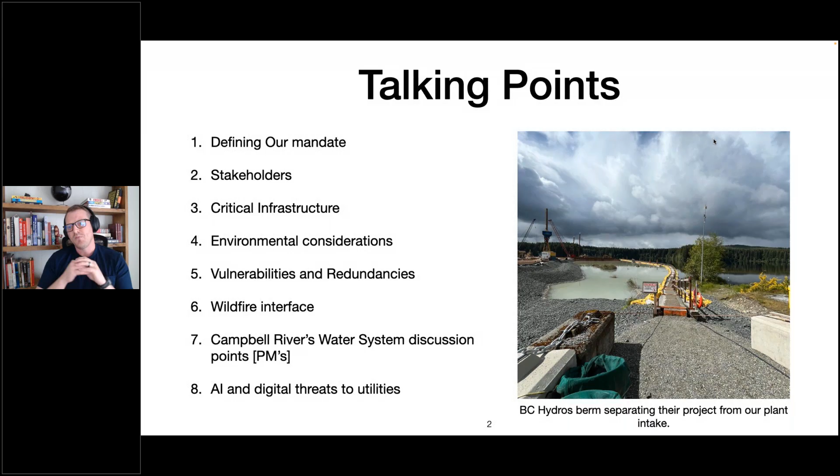So they have a plan in place if there was a breach, and then they would let us know. We would activate our plan, but they're doing a really good job. They're monitoring it constantly, and we haven't had really any issues yet.

Okay, so defining our mission. Of course, we're following the BC Drinking Water Protection Act, and the Drinking Water Protection Regulation is our foundation. And our mission, simply put, is to provide water that is suitable for consumption and for fighting fire. And to achieve this, we have a layered approach. We have operational competence, preventative maintenance, tied in with asset management, and then capital investment and stakeholder relationships.

This picture here is in the downtown core, our lowest zone. What's going on here is we've increased the pressure downtown, and we'll talk about that a little bit more later, but there's a good reason for it. But it's proving out that a lot of the old infrastructure has a lot of weak points in it, and a lot of things were just on the edge, and a few of these things have been pushed over the edge. So a cork popped out of the main here, and there's a big spiral fracture in the cast iron. So we dug it up. It was quite a day, and it was business as usual.

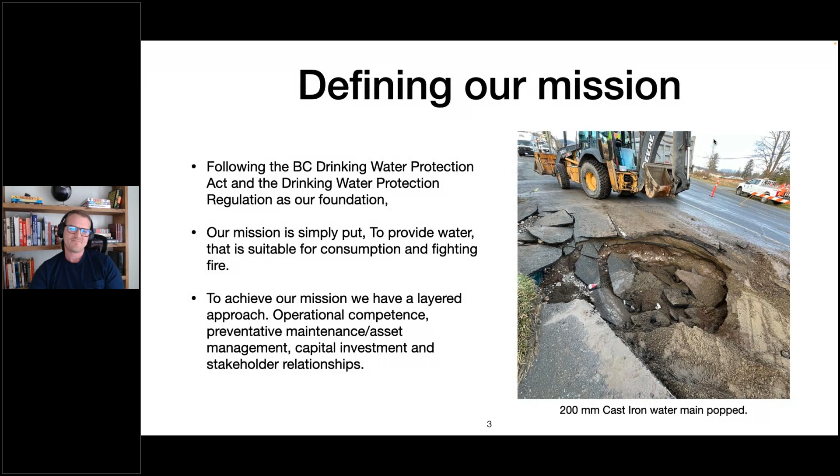Okay, so essential service. Resiliency means to withstand or recover quickly from emergency conditions. That's kind of the theme of today. And essential utilities are expected and counted on to perform their duties under any and all circumstances. So we achieve this by running reliable systems for our customers.

And here's a picture. We're doing a small capital upgrade. We regularly are getting rid of old PRVs, and we're in a chamber here. We had some stubborn bolts that weren't coming off with the socket set, so we decided to cut them off. And I will point out that this operator is wearing a hoodie with strings, which isn't appropriate for running a grinder. It could get caught up, so he shouldn't be wearing that. And on top of that, he should actually be wearing a face mask, or even a full face. We wear that now because you get the particulate protection, but also your face is fully covered and protected.

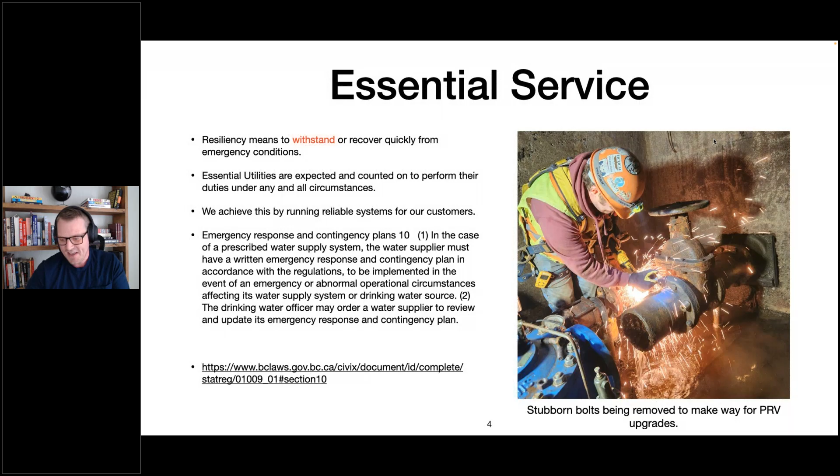And I don't mind saying that because I know that guy. That's me, so I don't mind calling myself out.

Okay, so stakeholders, they're stronger together. The definition is people and entities that affect outcomes related to our mission. As I like to say, friends in high places from different spaces. It's kind of cheesy, but it's true. So I have a bunch listed, and there's even more, but I'll just highlight a couple. Ultimately, the taxpayers are our customers, and we serve them. Like I was saying, they expect that the utilities are going to run and function no matter what. People want to wake up to flushing toilets and water running in all conditions.

Different levels of government. So policymaking and funding power, grants for infrastructure projects. This is at the higher level of management and the echelons of decision making, but it doesn't mean that we can't be in on the conversations when we're in operations or safety meetings. We know the system better than anybody, so we should be bringing forward our concerns and having a lobbyist outlook. We want to make sure that we're befriending the right people and influencing them so we can get positive outcomes for ourselves and our utilities.

In Campbell River, BC Parks has a bunch of trees that are really close to our water supply center. That's our intake building. And they're in the way because we're putting in some new reservoirs. So we want to have a good relationship with them and try and streamline this process as fast as we can, so we can get those trees out of the way.

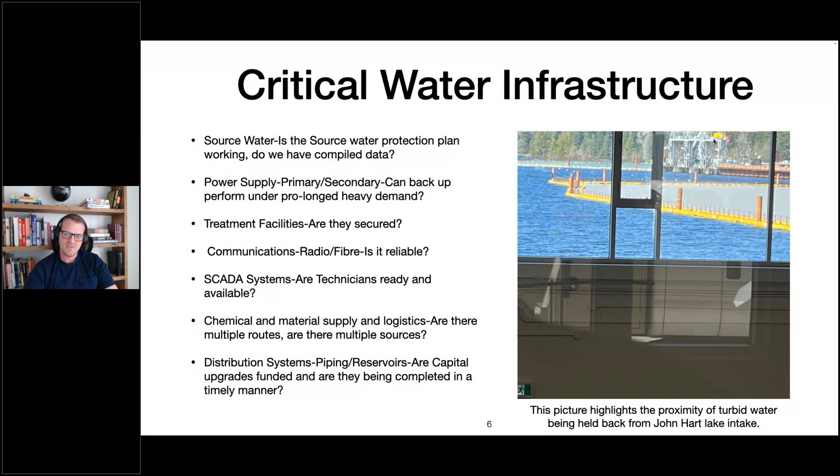Okay, so we'll quickly talk about the threats to water infrastructure. So the obvious one is wildfire interface, landslides and disruption to logistical supply lines, cyber attacks on digital infrastructure, lack of planning, collaboration between stakeholders, inadequate resources, funding and training, lack of control over policy.

What I mean by that is that most utilities belong to a municipality, and we're just a cog in the bigger wheel. We're not necessarily the focus on long-term planning and funding and things like that. So that could be a challenge, right? We want to do a lot of stuff. We want lots of money and we want to do lots of upgrades, but they have to think about some of the other things that they have to look after, some of the other departments.

Single source, single intake. It's kind of a wish list item for me. Some places have it. We don't have it, but I think it's cool that if you had a problem with your intake you could switch to another one.

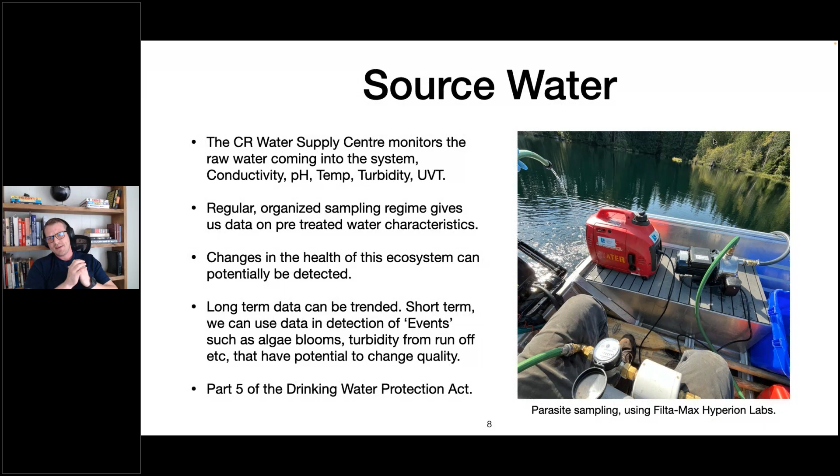Okay, so here's one of the other threats, the logistical vulnerabilities. So everybody probably remembers the atmospheric river back in 2021. Everyone's like, what's an atmospheric river? Wow, it's this heavy rain, and it got this cool name. But the flooding and the washouts damaged more than 20 sites along the Coquihalla Highway, 130 kilometers. And 7 bridges were completely collapsed or heavily damaged.

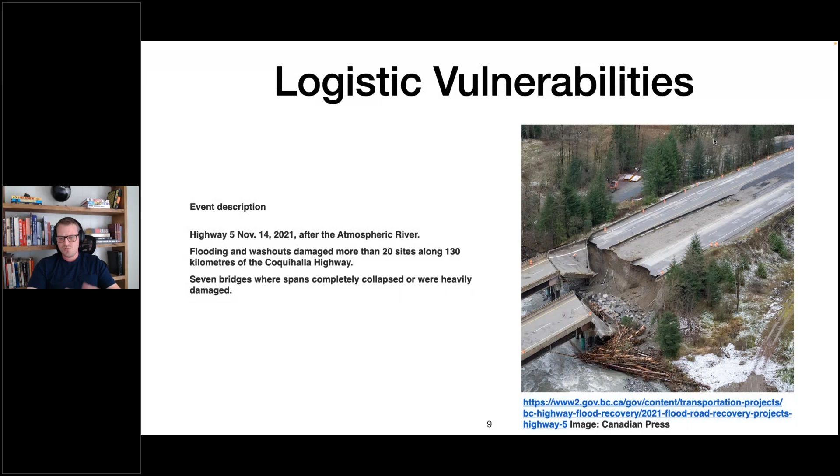So the reason I throw it in there is that I was talking about different routes for our supplies for our plants, and this stuff is not traveling on this highway at this point in time. And luckily we have other highways, but you can just imagine that something this bad happened to this highway, and then maybe just 1 or 2 other events happened at some of the other highways. We have major backlogs. So if you're looking for something material-wise that you need right away for your process, you might not get it. So that's why we want to think about these routes and the availability of products from different suppliers.

And that's why I bring up stockpiles. So like I was saying earlier, we have hypochlorite that we generate on site. And to do that, we use salt. So on the floor there, you can see we have about 14 pallets of salt ready to go. And this time of year, with the heavy flows, we're using about a pallet, almost a day, a week, roughly. So once we get down to maybe 7 pallets, we're going to think about ordering another set and keep that stockpile way up. So bridge or no bridge, we're making bleach. That's the idea.

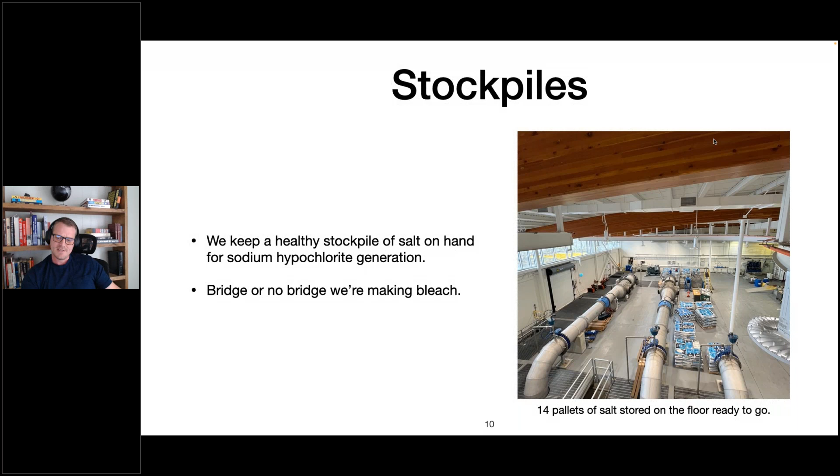So with that, we don't want to be a one-trick pony either. So taking systems offline for maintenance or emergency repair, it's going to happen. So we need to plan for it and expect it. Taking reasonable steps to imagine outcomes as they might unfold in undesirable situations, that's kind of what I'm getting at. And then when you do that, you can let this determine your system's vulnerabilities and your state of readiness. So storage capacity and redundancy are key.

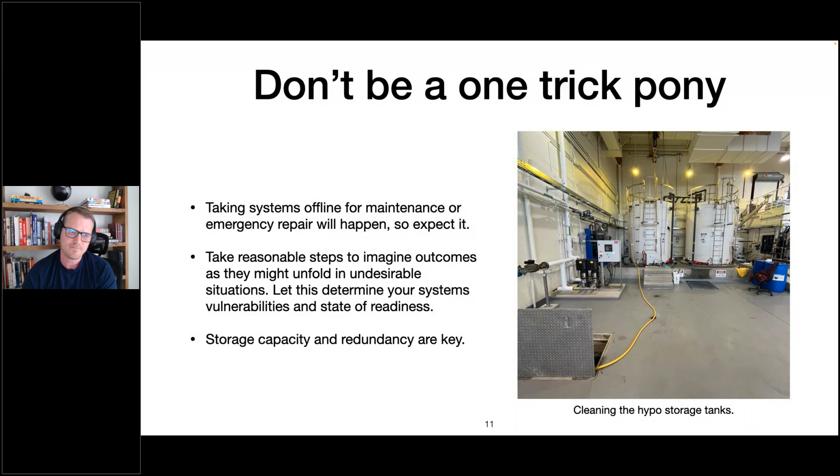So the redundancy piece for dosing for a critical system like this would be having a separate system altogether. So we have 2 barrels of 12% bleach, and we have these Grundfos pumps, and we can switch that system off, isolate it, and we can pump bleach in from this system. And this is our redundancy. So if we need to do emergency repairs over there for whatever reason, we'll switch to this and we'll run this. And it's good to run through it if you do stockpile it and you have it as a backup system. You want to run through it probably every 3 months or so because it starts to degrade and loses its potency. And then the second part to that is you can get your operators to practice switching in between the systems because it's not seamless. And if you've never done it before, it's a little bit nerve-wracking.

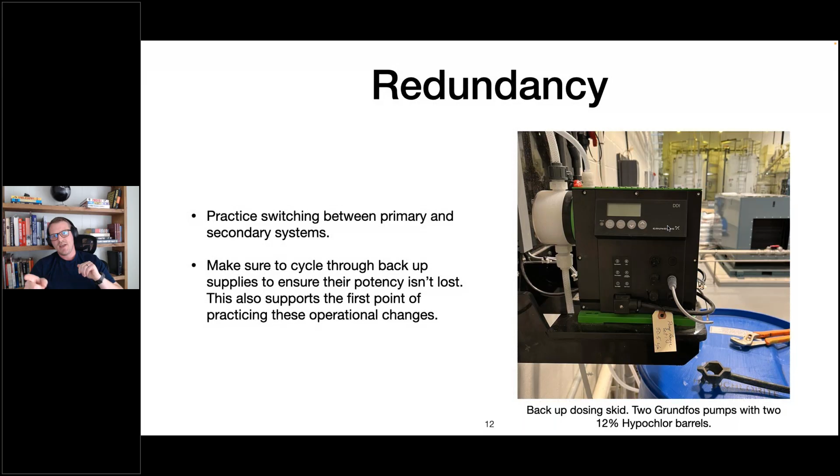So in Campbell River, we have an on-call system where all the operators go on call for a week at a time. And they're distribution operators and they do some of the treatment as well, but they have to look after both when they're on call. So this is a good opportunity to get them up there and practice switching in between systems.

Okay, so this is why. So this is the main dosing skid. And as you can see, we have 2 pumps and only one runs at a time. So there's a bit of a redundancy there, because if one craps out, you can run the other one and then fix the one that crapped out. But the problem is they share a common header on the bottom there, that's drawing off the tanks. So what happened here, these are displacement pumps. That bracket on the bottom left, it wore through the line and created a leak, and it was obviously going to get worse.

So we tackled it by isolating this system completely, isolating the tanks, switching on that emergency backup system, 12%. And at this time of year, with the amount of bleach we had on site, it's about 16 hours of dosing available. So we cut that piece out, and we just glued in a straight piece there, and we used 2 unions, so we didn't have to push apart the brackets and take a bunch of stuff apart. It was just put it in and do it up, and you're good to go.

And off to the races we went. Everything held, and it was good. And we switched it back on.

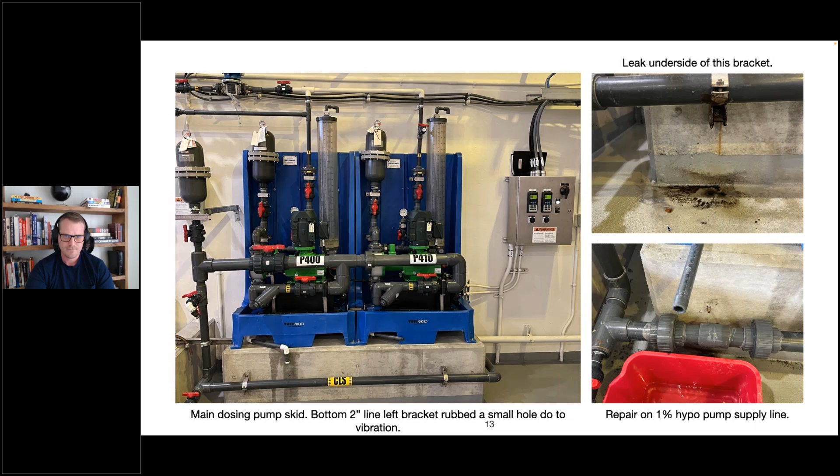So in a similar case, this thing's getting, it's not old, but it's about 8 years old. So we're starting to get some things leaking now. And here's a case where we're able to just isolate the one pump that was leaking and then turn on the other pump, like how it was designed to be. But as you see, it's pretty tight, and there's a bit of orientation involved.

So if you're gonna tackle something like this, or if someone asks you to, after you isolate it, you take it apart. Before you take it apart, you should take some pictures and really study the orientation. As you can see, there's a back pressure valve in the back, where the handle's in the back of this pressure gauge. You have to get that right, obviously, the first time. Otherwise, you're gonna have to cut it apart and redo it.

And the same thing with the unions. Make sure you get your collars in the right place before you glue them, because you'll go to do it and you'll notice your collar's not on, and then you're cutting it all out again. And that's why I said it was a little tight and there's a little more swearing, because these things happen.

So in the bottom right picture, I just wanted to emphasize that if you're going to be doing some gluing on systems that are corrosive, like hypochlorite, make sure you use the right glue. That orange can is specifically for things like hypochlorite. It's listed on the can there.

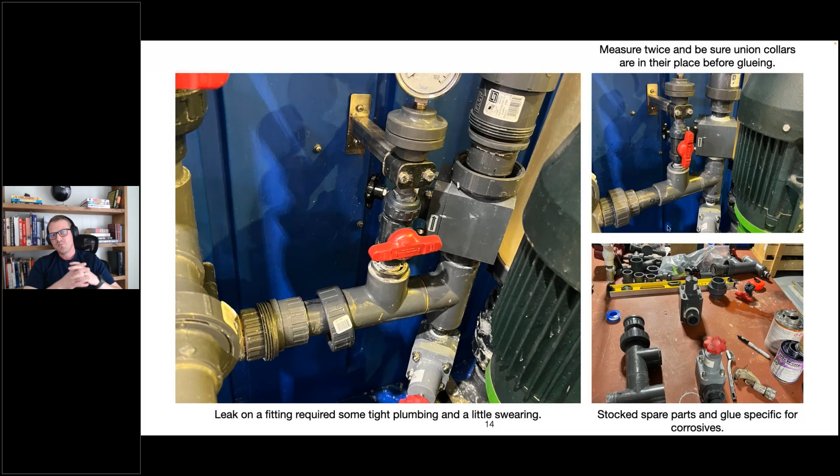And then additionally, you want to make sure that you have spare parts available to you and stocked and cataloged. We don't want to be having these situations come up where we need to make repairs, and then we have to worry about securing supplies. You should have some backup supplies on hand and ready to rock and roll.

Okay, so like I was saying earlier, we have an on-site generator, and it's pretty sweet. It's all I've ever known. Before this, we did have chlorine gas, but when this plant was built, they pitched the gas and they installed this system. And it's pretty slick. The only byproduct that's dangerous is hydrogen gas, which is very explosive.

But there's a bunch of interlocks built into the system, and there's blowers, and they had to be running and ejecting before this thing even starts up. So it's quite safe. We have hydrogen detectors all around and lots of fail safes. So it's a good system.

So here we're doing maintenance on it. This is a scheduled muriatic acid wash, and it takes off all the stuff that gets baked onto the plates inside, and you'll start to notice it kind of running funny, and your testing will be a little bit off. But we kind of go by hours as well. So like every 1,000 hours, we'll start to think about running an acid wash on this thing. And you can use vinegar, but we started using muriatic acid just because it's so much stronger and it does such a better job.

But before you put any acid in there, make sure that you rinse it out at least 3 times. Make sure there's no bleach in there. You don't want to mix bleach and the acid. You can make other gases that are deadly. So you have to be really careful with that.

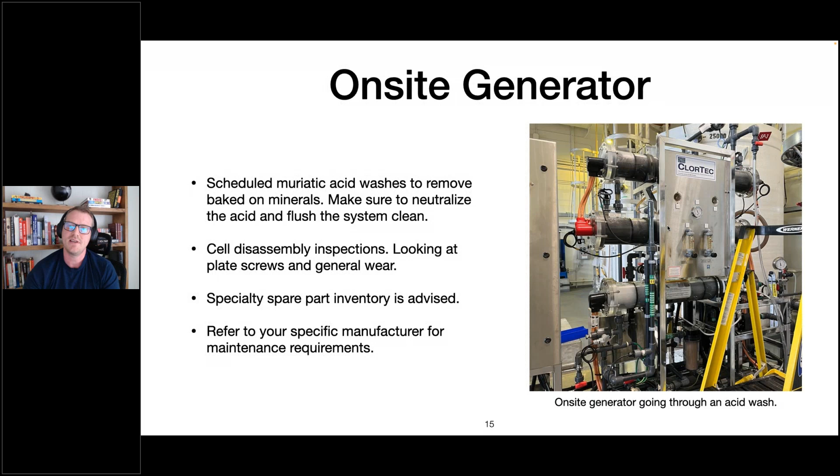Okay, so just make sure you do refer to your specific manufacturer for any maintenance requirements. It's not a one-size-fits-all kind of deal. Okay, and when you're doing this stuff, just remember that slow is fast.

You don't want to rush through this. This is a very expensive system. So take your time and think it through. Make sure that the valves are in the right positions when you go to fire it back up. You don't want to have your discharge valve closed, obviously.

This system has a fail-safe in it. It has a burst disc. So if it does over pressurize, that'll burst and then it'll just run onto the floor. But obviously, you just want to avoid that altogether. And then make sure the people around you are good to go, right?

When you're mixing acid and water or when you're neutralizing it, it's one thing to have your own PPE on, but just make sure that your buddy that's working with you is also ready and talk it through. And then I know it's tempting, I've done it, to rush into these types of jobs if you've done it a bunch of times because it becomes second nature. But it's really good to have the SOP out and just go over it at least once with your partner because you'd be surprised, little steps that you might miss can end up being important ones.

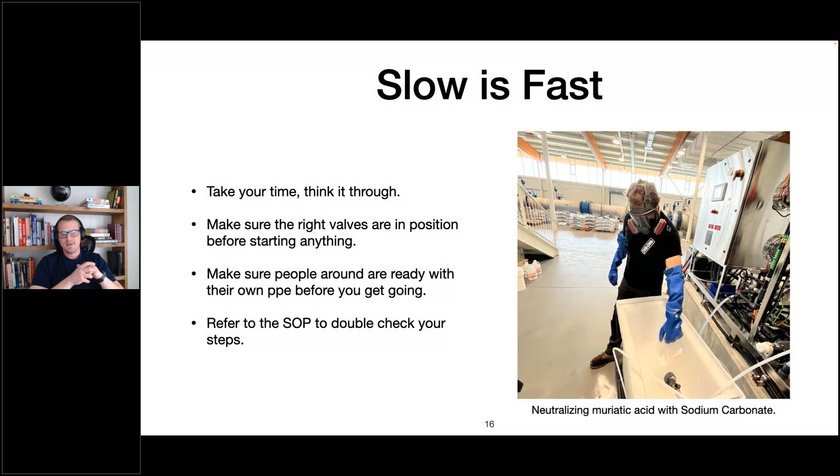They recognized some of the shortcomings of the system, and that was a couple of things. So they had undersized generators that couldn't keep up to the process in high demand, and it ended up being boil water for 17 days for one of the counties. And you're probably thinking that's the least of their worries, and I kind of agree, but it's just the principle of it, of having the right size backup generators to run the process no matter what.

And then they had some troubles with communication and sharing public notifications, and then just extreme water system demand due to fire response and high leakage. So I think it's interesting to always remember that when you have a devastating fire like this, the services are getting burned up too, like the connections, and then they're open, right? And it's a huge parasitic loss on the system.

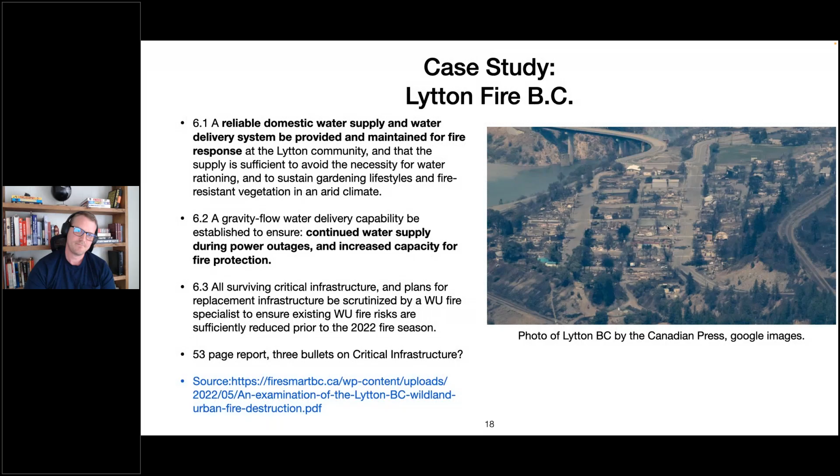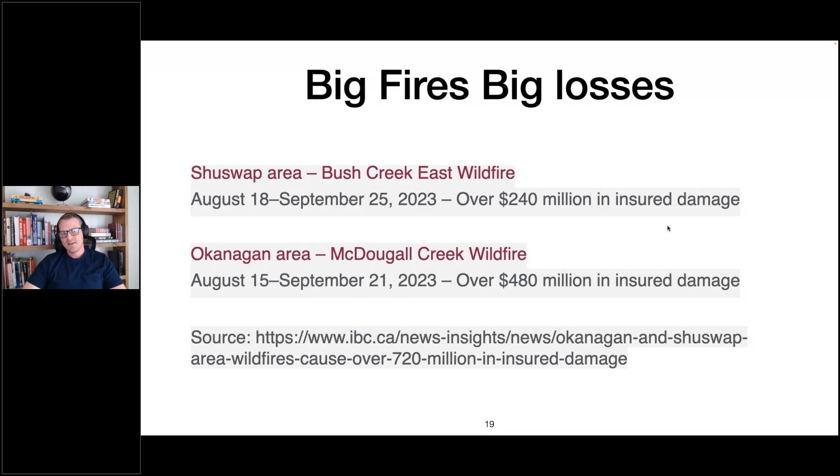So if you wanted to put a dollar amount on these fires, here it is. Big fires, big losses. This was in 2023, Shuswap area, Bush Creek East wildfire, and the Okanagan area, McDougall Creek wildfire. Together, $720 million in insured damages. So that just really emphasizes how big and how damaging these fires really are.

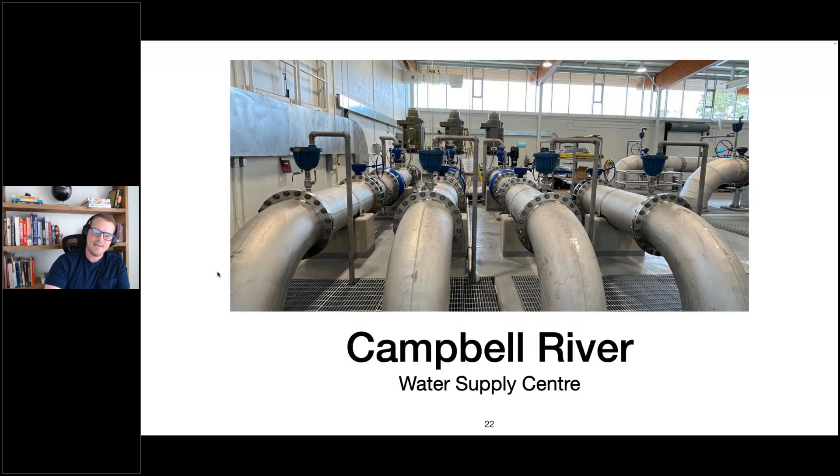Okay, so again, we're switching gears. This is the Campbell River Water Supply. This is the intake section of the building. And I'm going to start talking a little bit about water supply and maintenance and that sort of stuff. So here's a background on the system. So Campbell River Water System, the system capacity through that plant is 1,050 liters a second max. After that, the velocities become too high against the lamps in the quartz, and that's from the manufacturer.

So we set aside 220 liters a second for fire protection. That's reserved, and that's in accordance with the fire underwriters' requirements. And more would be needed, obviously, in major events like that wildfire or any wildland interface or a major catastrophic event. So Campbell River has limited storage capacity. We only have 2 reservoirs in the main distribution zones, and then we have an additional one in the north system. That supply center supplies water to both systems, but the north system just has a lower service level. It's just for our industrial zone and one street, basically.

So without residential water meters in the city, we must rely closely on monitored flow data to enact water stage restrictions promptly when summer flows get to an average of 700 liters a second. So as soon as it gets to 700 liters a second on average, we enact stage 2 water restrictions, and it's actually very effective. We go down to 1 day of watering a week, and we see a significant improvement. So water metering and system storage are 2 serious considerations for future improvements for this system. And we are breaking ground in the near future, and we're putting 10 megs of storage up at that plant. So it's going to be a huge improvement for us.

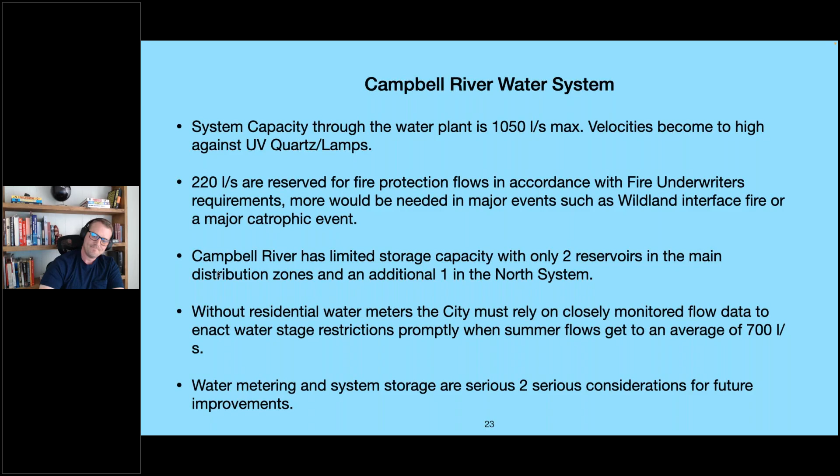Okay, so let's talk about water supply. It's key to understand where your water is going. This aids us in understanding complex shutdowns, rerouting of water in emergency situations, and just the overall balancing of your PRVs and your reservoir discharges, because they're feeding into the same zones. So we want to be able to balance them and control when the reservoirs are unloading and loading. So maintaining the PRVs and the reservoirs is critical to the reliable movement of water throughout the system.

Here's one of our chambers, and we just finished installing 2 new PRVs. These are Cla-Val valves, and we replumbed them and we got them online, and they're working really well for us.

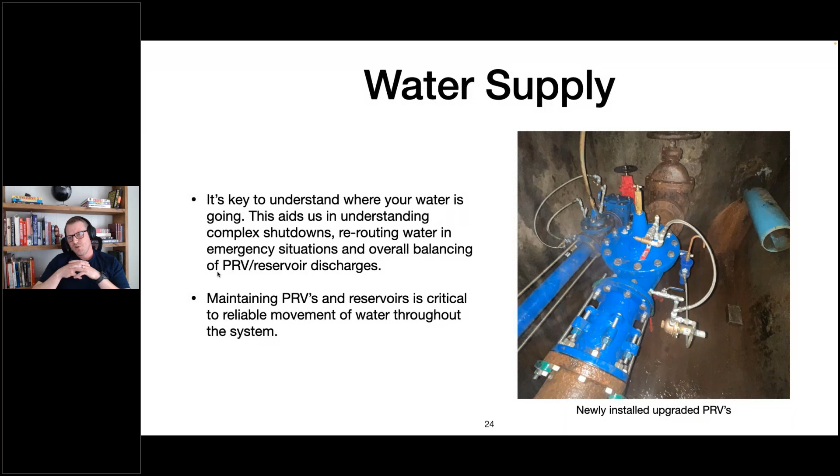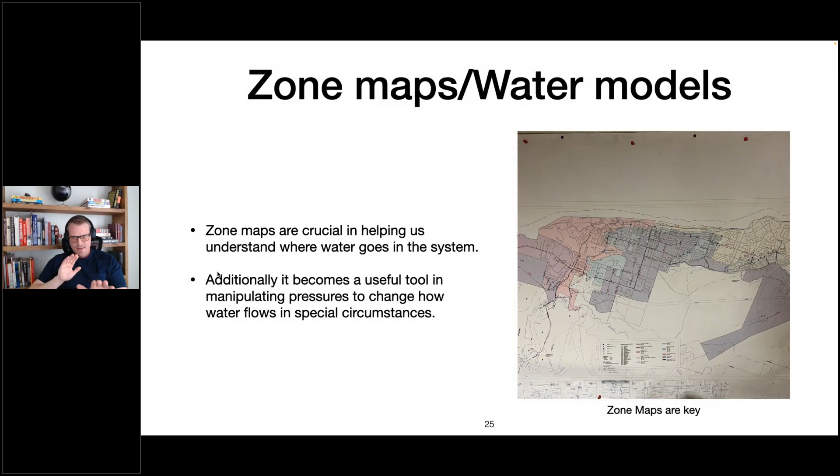So, zone maps. Zone maps are crucial in helping us understand where the water goes in the system. Additionally, it becomes a useful tool in manipulating pressures to change how the water flows in certain special circumstances. This is a picture of our zone map, and it has the transmission mains on it, all the PRVs and the reservoirs on it, and it shows where they're discharging into which zones. And then it has on there all the closed valves that separate the different zones.

So, understanding your options. This is kind of what I'm getting at. Here's an example of using the water model knowledge to redirect water manually. That's a bit of a story, so I'll just go through it. On Thursday, 30 minutes from quitting time, we had communications fail at the Beaverlodge Reservoir, and it was unexpected, obviously. It turned out to be a hardware issue that couldn't be fixed right away. It was fixed the next day.

But this meant that the altitude valve down at the reservoir couldn't see the level in the reservoir, and it was just reading its last position, which was in the off position. So the reservoir was draining uncontrollably. So we consulted our water model, and in there's some control logic, and we understood from consulting that increasing the discharge pressure from these PRVs, which sit way higher in the

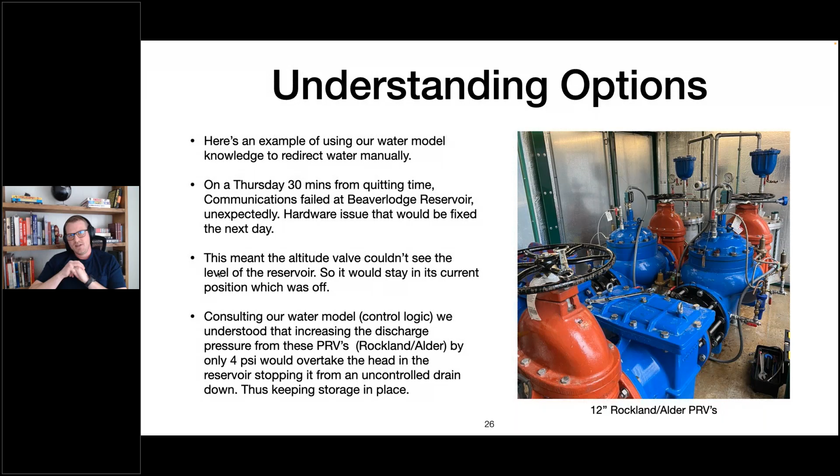HGL, if we increase them by 4 psi, it would overtake the reservoir, and it would actually freeze it and not allow it to drain, and it would even fill it to a certain level, and then it would just stop. So that's what we did, because we didn't want to drain the reservoir out in an uncontrolled fashion. We wanted to keep that at a level where it was ready if we needed it for, say, a fire response or something like that.

And then we take pictures so it's documented so we can compare it for the next time that we go in there. After that, we undo the lockout, because of course we had to lock this out first. Then we fill it up, we test the quality of the water, and if it comes back all good, then we put it back online. So this is a 3-year cycle.

We're going in here and cleaning this, but a part of the package is the altitude valve that is actually located at the reservoir. We want to make sure that that's getting looked at way more often than 3 years. That should be a part of the PRV preventative maintenance package. So we want to make sure that the solenoids and the diaphragms and the speed controls on these valves are being looked after to make sure that they're running reliably.

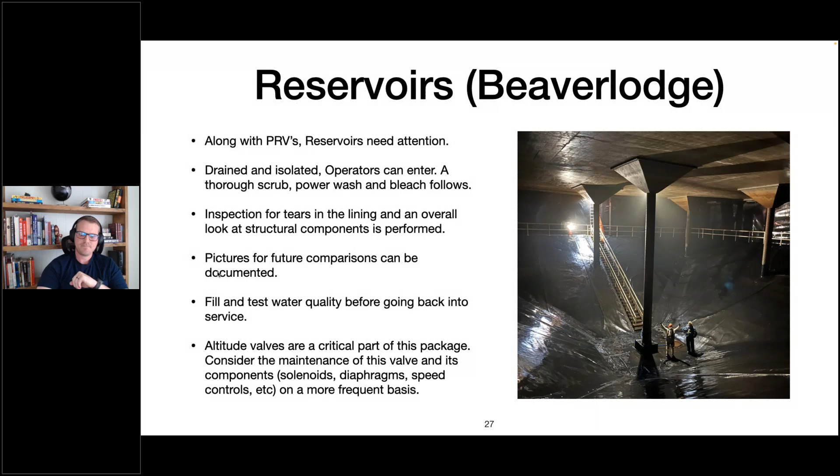This PRV is one of our main ones. It's actively on duty. The biannual inspections, that means twice a year, are more for the underground ones that don't see a lot of action. This one will probably get 3 or even 4 inspections done to it. So maybe it's actually like a quarterly inspection for this specific valve, just because it sees so much action. And outside of that, we have a 5-year maintenance plan, where we remove the seats, the rubbers from the valve, and replace them.

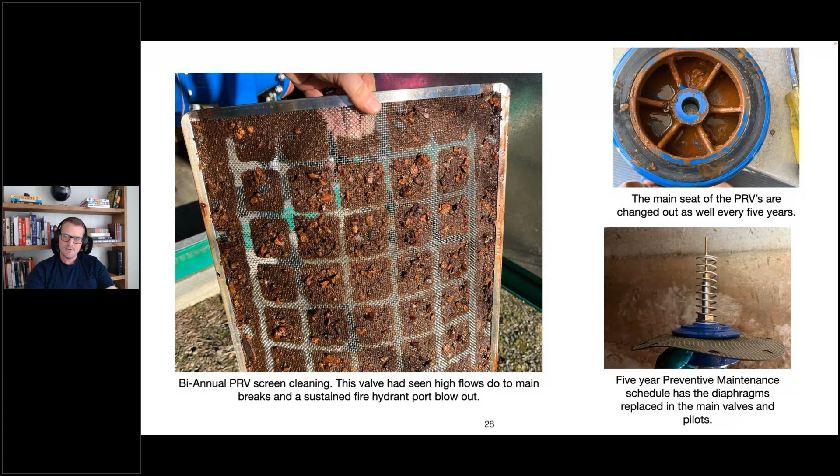Okay, so another part of that biannual inspection is these ports. The valves have upstream, downstream, and head ports, and the upstream port takes high pressure water and it puts it through onto the head, the cover of the valve, and that's how the valve is regulating, and it runs through a pilot system. So if you don't make sure that these are cleared out when you do your inspections, what happens is that tubercles can build up in the port, and then you lose your supply to the head of the valve. Basically, you lose control of the valve.

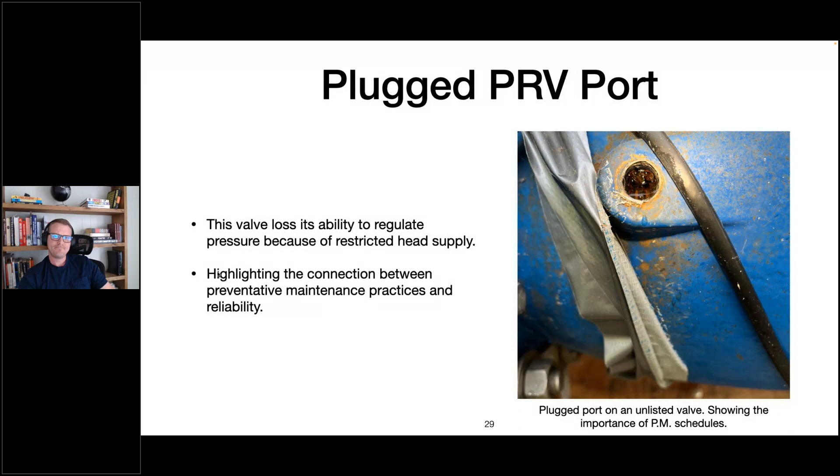Also, when we install plumbing on the pilot system and on these ports, we replumb them and we put T's in. So you can go there, isolate it, and then you can just take the plug out of the T, and then you can rod the port with a brush or a screwdriver instead of having to take the valves off and all the plumbing. It just makes it way more streamlined. It's really nice.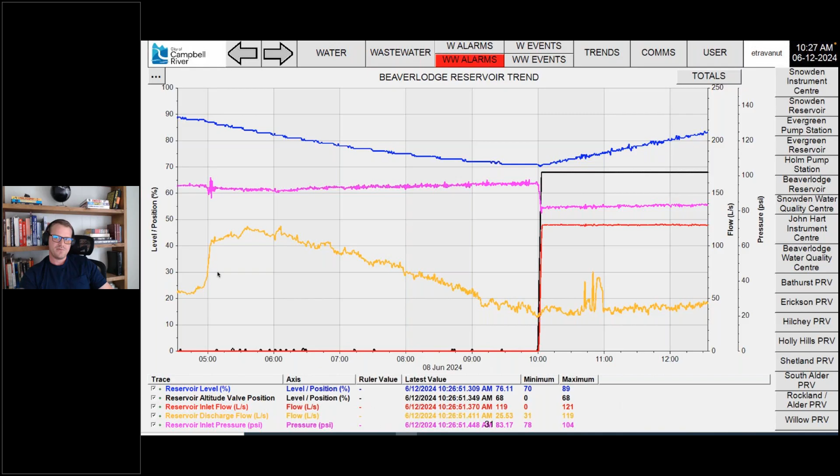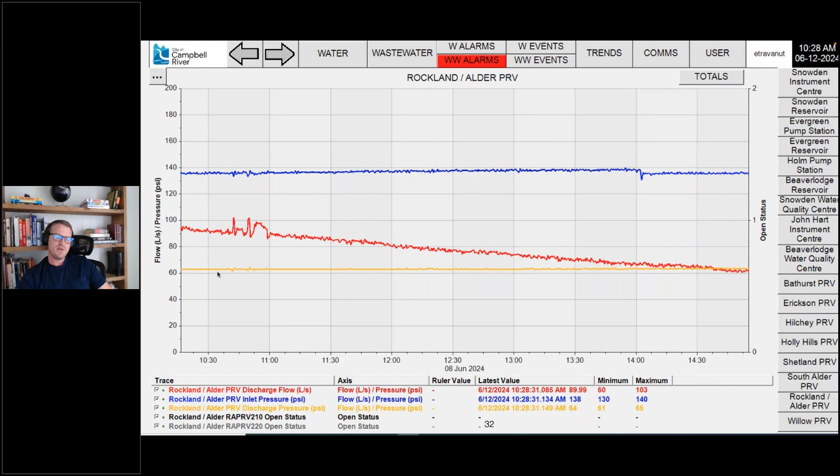And then again here, this is the Rockland Alder PRV, which was pictured earlier in the slides. Again, if you look just before 11, that's them working, and they're pulling water to the fire from this valve and from that reservoir. So we can track that data, and they're roughly using between 40 and 50 liters a second. So you can imagine that's just one house fire with one engine.

If we had some kind of interface situation where it was the whole fire department plus mutual aid, that's a ton of water, right? So we want to have that command structure in place, and we want to be talking with one another. We can tell them, hey, you're getting to that threshold. This is how much water's left. You guys might need to start picking and choosing and adjusting your tactics.

Okay, so here's the Willow PRV, and it feeds the downtown. And it's kind of a neat setup. There's some new programming, and there's a solenoid actuated pilot control system. So there's a regular conventional pilot system, and then there's also this pilot system that's controlled from SCADA using a solenoid.

So why is that important? There's another reservoir called Evergreen Reservoir, and it sits in the highest zone in town. It's way at the top. And this valve sits way at the bottom, but this valve has 200 PSI behind it. So the people that designed the water model, they recognized that both reservoirs, when they're loading from their altitude valves, were pulling off the same trunk main, and it was dropping the pressure in the south end of town.

So they were able to design these valves to have a solenoid click on at predetermined set points. And what it does is it increases the pressure by 18 pounds, and then it pushes water up into the zone where the Evergreen Reservoir is, and it fills it from the downtown, utilizing that high pressure.

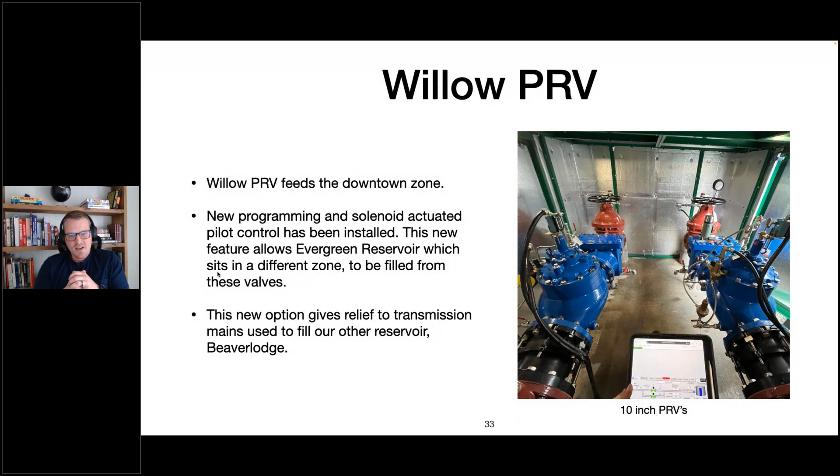And that's why I mentioned in the first or second slide, that backhoe picture, those are the weak spots that are being found by this new control logic. When we're turning it on by 18 pounds, all the weak spots in the system are coming out and rearing their heads. Okay, so with this in mind, that didn't cause this. That's not what I'm getting at.

What happened here, this is a private hydrant that was tucked in behind a warehouse down by the ocean, and it was sub-zero conditions, and somebody left this hydrant fully charged, and it popped. And so over a course of several days, we approximate 47 million liters were lost through this thing. And what happened was that solenoid, let's go to the next slide.

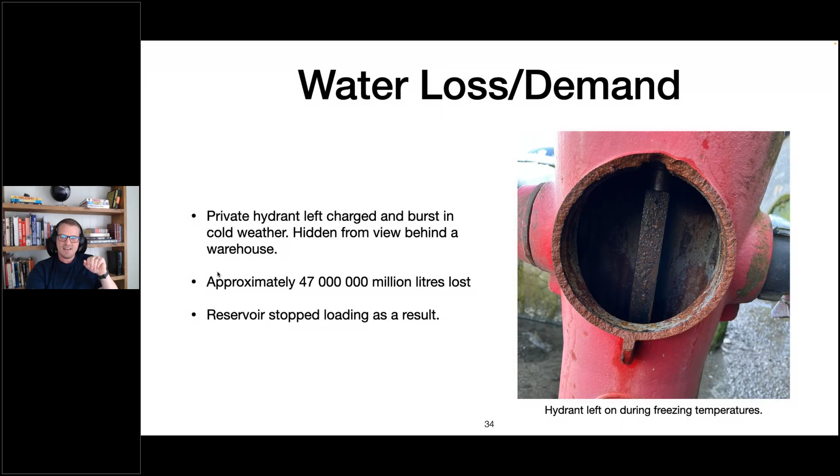That solenoid clicked on about 9 o'clock. So you can see at 11 o'clock, it broke, and then you see the discharge go way up, this red line. And then the solenoid clicked on, and it pushed out almost 120 liters a second. But the parasitic loss from that hydrant was just too much, that the reservoir kept draining.

So we came in and we noticed the reservoir was draining, but the valve was pumping out almost 120 liters a second. We're scratching our heads, like, well, there has to be a leak, right? The water is supposed to be going into the reservoir, but it's not. And so we searched the downtown because we understood that this water's in this zone and it's disappearing. It's not making its way into the top end of town.

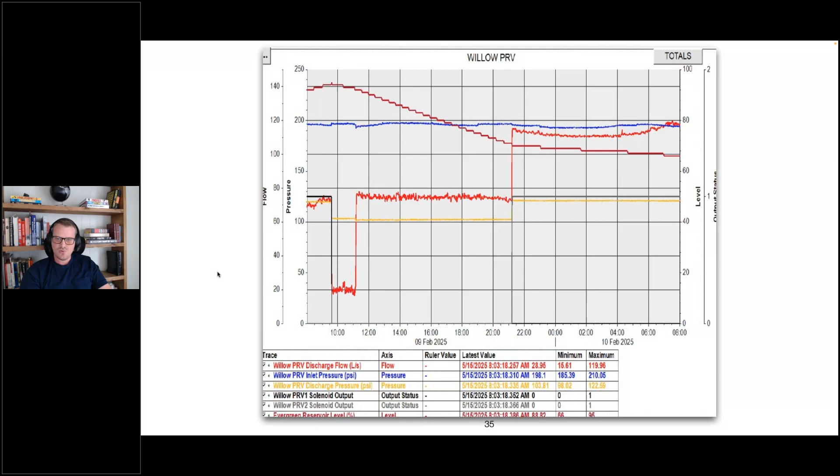So we did find the leak, shut it down, and then we were able to go back to our way of filling from the solenoid actuated valves downtown. So again, that's just understanding your zones and understanding the water model and which valves do what and where they feed. And it just helps us a lot with troubleshooting.

Okay, so this is something I just threw on here because I thought it was interesting. We have newly acquired listening devices or pressure detection for leak detection. So these hydrants, this is a third party company that does this, and we take off the old hardware and we put this new hardware on and we put it throughout different zones, and we're monitoring some of the data and characteristics that these things are picking up.

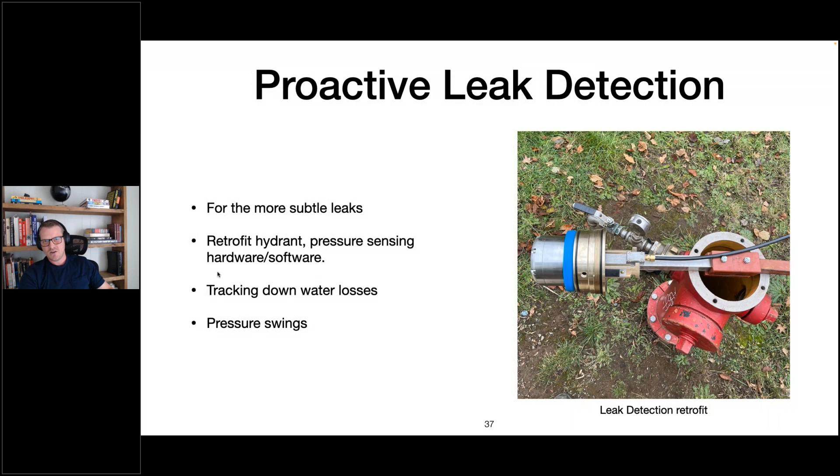I won't say too much more about it because I don't know enough about it, but I just thought it was an interesting piece of kit, piece of technology that's out there. If anyone else is using it or has something to say about it, I'd love to hear about it in the conversation period after. Okay, here's the Terminator.

The digital world of water and emerging threats. So automation is advancing, technology is great, so are the threats. AI is still largely unregulated, as we all know, and tech companies and state actors, they're kind of in the next arms race to create machine learning. And I feel like all of us are stuck in the middle. So this is from cyber.gc.ca, the federal government. And this is what they have to say about it.

So state-sponsored actors are targeting critical infrastructure. State-sponsored actors target critical infrastructure to collect information through espionage, to pre-position in case of future hostilities, and as a form of power projection and intimidation. It's real James Bond type stuff, and I find it very fascinating and kind of troublesome as well.

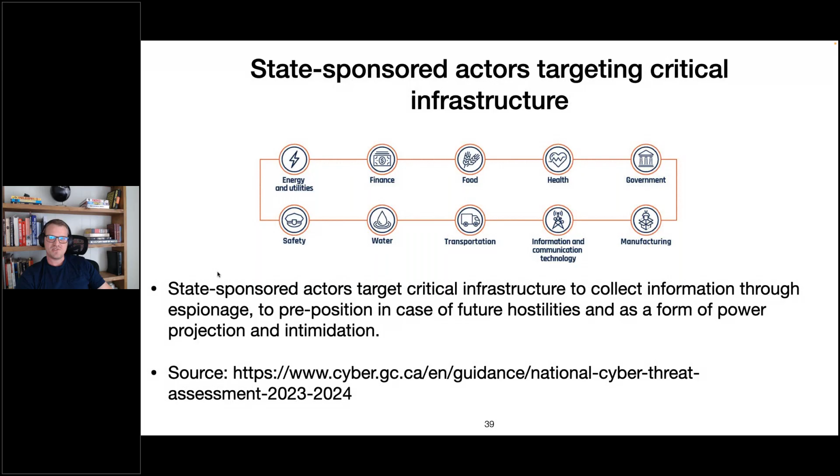Okay, so the cases are rising. This is from the same site, federal government. Cyber criminals target critical infrastructure. The Cyber Centre is aware of over 100 cases of cyber threat activity targeting Canadian municipalities since the beginning of 2020. So keywords, municipalities, that's us, right? And we're the ones that are running these critical infrastructures and utilities. So it's something that should be on our radar at the very least.

So this is a quote from a letter from the Environmental Protection Agency Administrator Michael Regan and, at the time, in the last administration, National Security Advisor Jake Sullivan. This is American. So the quote is: "Drinking water and wastewater systems are an attractive target for cyber attacks because they are a lifeline critical infrastructure sector but often lack the resources and technical capacity to adopt rigorous cybersecurity practices," Regan and Sullivan wrote in a March 18th letter to all 50 US governors. So again, even at the highest level of the American government, they're talking about it.

And I actually listened to something very interesting lately from an American Air Force brigadier. He was talking about some of their SCADA systems on the power supply side of things, and they know of viruses and things that are already embedded in their power supply systems that they can't get rid of. So it's on their radar, and they're talking about it a lot. And I think that it's interesting. It should be a part of our conversations as well.

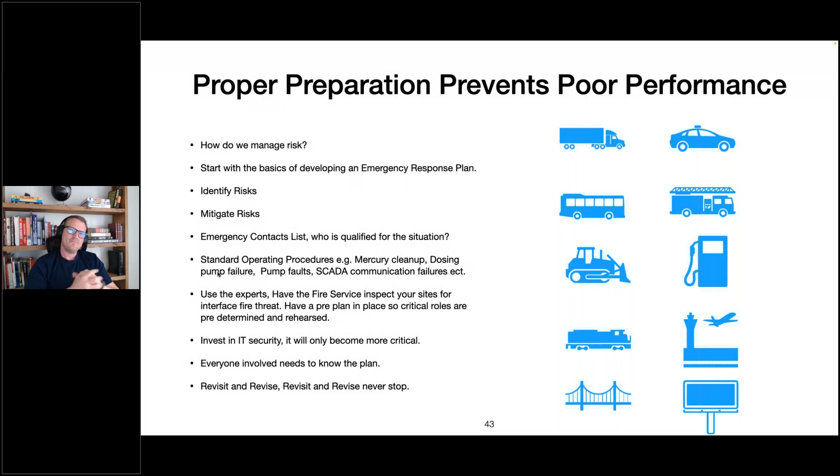Okay, so we're doing what we can, right? Solutions aren't always perfect. I know that. We attempt to mitigate problems with the tools at our disposal. That's all we can ask for. So we're making the effort and the noise for the sake of due diligence. During the summer months, we put a sprinkler up on the roof of our water supply center. This is the Fire Bozz Mini, and it's just one of those things that we do in an effort to protect the facility in case there ever was a wildfire that rolled through here.

Okay, so another thing I just want to talk about quickly is regular inspections. Inspections lead to identifying issues before they become problems, ideally. So planned work is better than reactive chaos. When it's an option, we choose the controlled version of system improvements. We don't just let things blow up. We try to maintain them and we try to improve them.

I was in a PRV chamber doing some maintenance not that long ago, and I noticed the deflection in this bypass line, and this is a high pressure line. So this is unacceptable, and it's a problem, and we're gonna take it offline and get rid of it. We're gonna put some blind flanges in and just take it out completely.

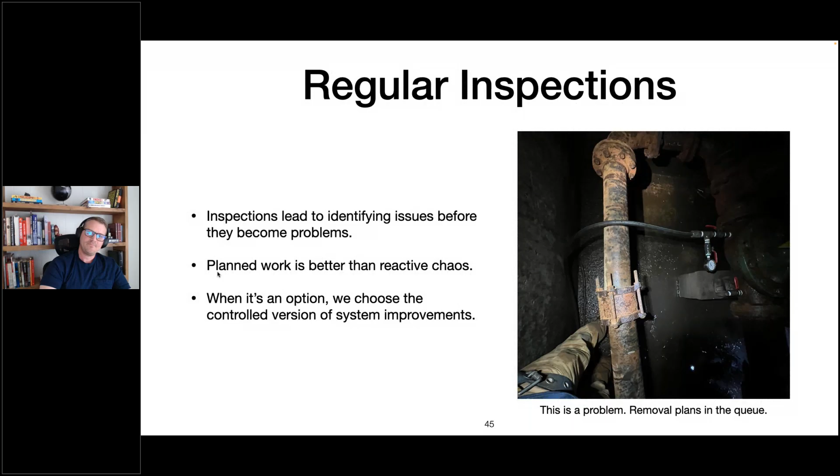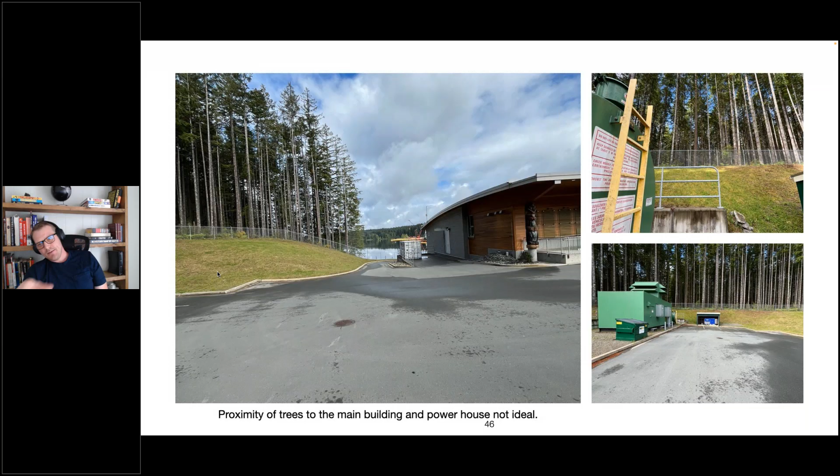So this is the water supply center, and that's the tree line. So that's why we have the sprinkler on the roof. If there ever was a fire with embers and things like that, we just want to keep the roof wet. This is our main power supply, that bottom right picture. That's where our hydropower comes in.

And then on the back side of that, we have our emergency generator. And in front of that is the diesel tank, and it's actually the closest to the tree line. So we have some hoses and some nozzles that just sit on that during the hot months, and then we can just turn the hydrant on, open a valve, and that stuff's getting cooled down with water.

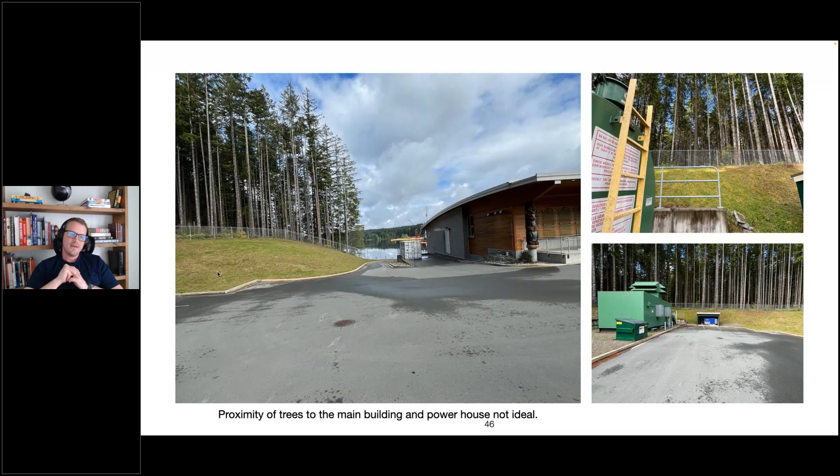Here's the Fire Bozz Mini again, and then here's some hoses that we just brought out, and we're just making sure that there's no leaks in the hoses, and we're just trying out the system, making sure that we have ample pressure and all that good stuff.

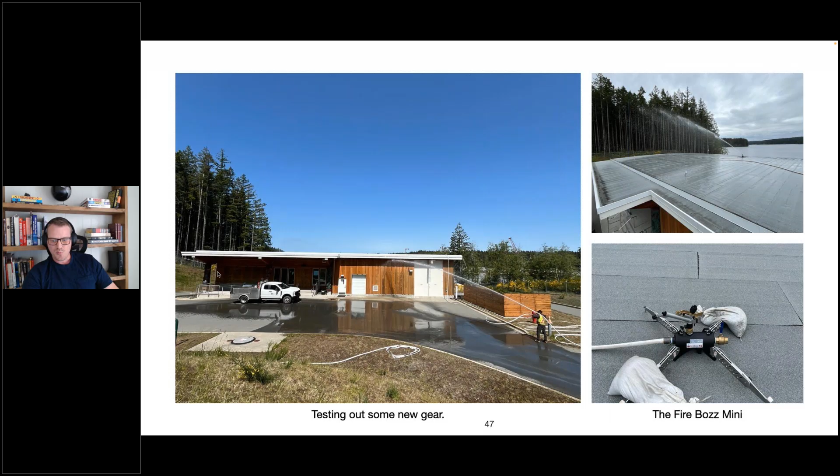Okay, so be resilient, engage with stakeholders, have multiple sources and routes for material, build in redundancies for critical systems, train and qualify your people, develop, revise, and practice emergency response procedures. Be reliable and keep the water safe and keep it flowing.

Here are some of the available resources out there that you guys can use if you're interested. The EPA I actually find is quite useful. It's the Environmental Protection Agency. That's our American counterparts. FireSmart BC, the provincial BC Wildfire website. They have some good stuff. Of course, the EOCP and the BCWWA. Your local fire departments, you should definitely talk to them.

The Water Distribution Operators Facebook page is hilarious. If you guys are operators, definitely go check that out. It's North American wide, and there's just all sorts of funny stuff on there, and good stuff too. You get to see what other people are up to outside of our jurisdictions, and yeah, some of it's pretty comical, and there's some lessons to be had. And then, of course, the BC Small Water Systems Online Help Center. That's this platform. There's lots of good stuff.

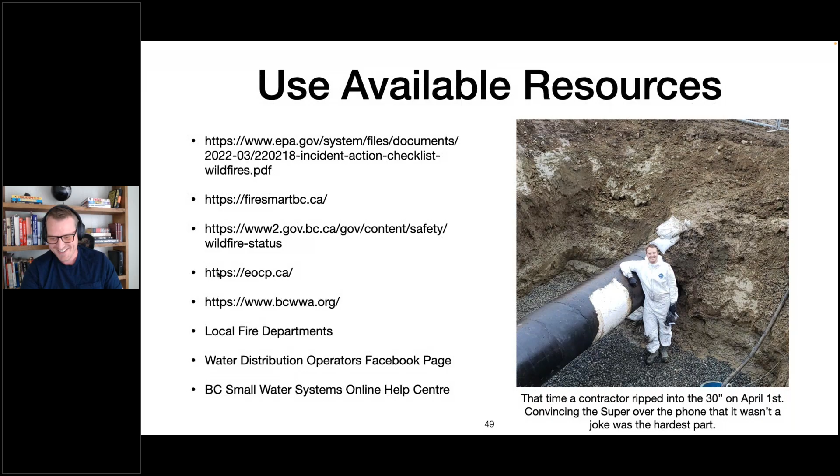This is just a picture of our biggest transmission main, our 30-inch. On April 1st, April Fool's Day, a contractor put an excavator through it, and me and another buddy, we went there to assess it, and we didn't know that's what they had hit. So we called our supervisor, and the hardest part of this whole day was trying to convince him that this actually happened. It was great. It was terrible at the same time. It was a big day.

Okay, this is an honorable mention to the City of Vancouver for their fire protection redundancy system. It's called the Dedicated Fire Protection System, and it's quite impressive. I think it's like one of three in North America, I believe. I won't talk too much about it, but there's a gentleman named Brenden Kergen, and he does a piece on it in the Vancouver Is Awesome news page, and it's worth checking out.

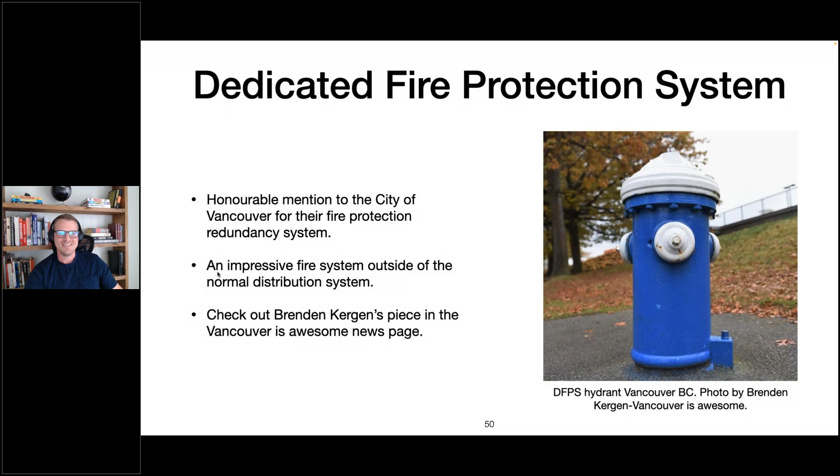It's really neat. Every time I'm in Vancouver and I see one of these blue hydrants, I'm like, oh, this is great. It's so cool. And I'm usually with my wife, and then, yeah, check this out. She's like, please stop talking about this. It's not that cool.